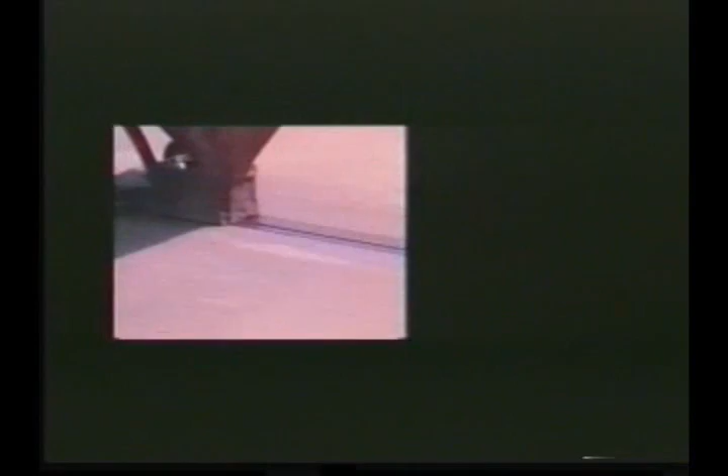TA500 is modified with polymer for greater flexibility and adhesion in both asphalt and concrete slots. Using TA500 will increase your productivity and thereby your profitability. This video will demonstrate how quick and easy TA500 is to use and how to properly seal a loop with it. For demonstration purposes, we will be sealing a 6-foot by 40-foot quadrupole loop.

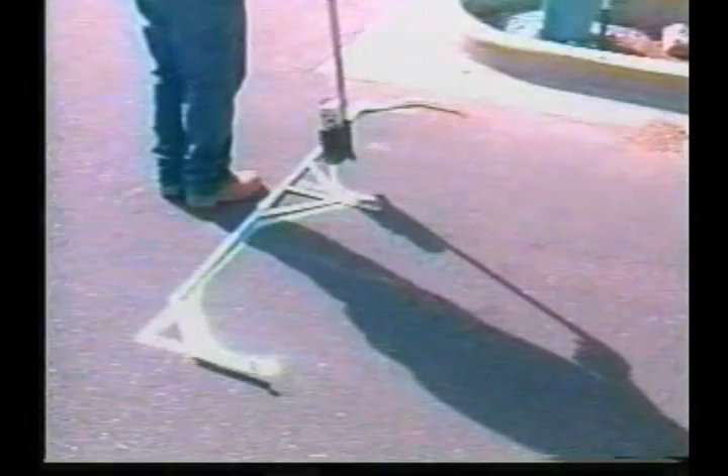We'll start by making the loop on the roadway. To lay out the loop, we use a template to efficiently mark out both ends of the loop. After we have marked our loop, we will cut a 2-inch by 3/8 inch wide saw cut using the dry cutting method. You can also wet cut when using TA500 loop sealant.

If you are wet cutting, make sure there is no standing water in the slot. Slots that are slightly damp or moist are recommended to ensure desired penetration and adhesion of TA500 in the slot. Standing water will create voids in the sealant.

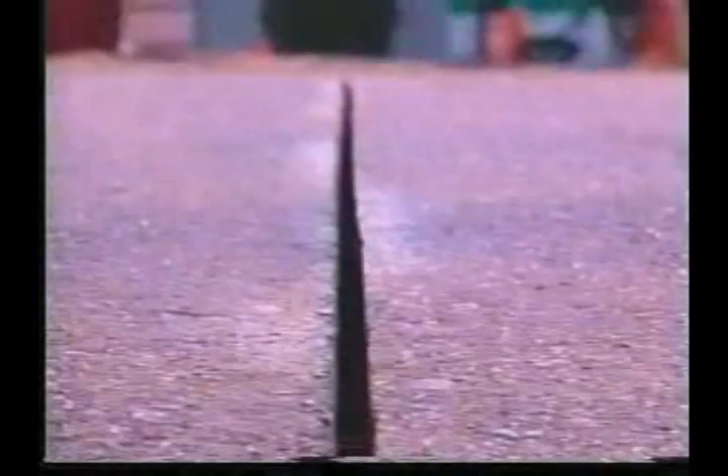As you can see, the slot is now full of dust and debris. Using an air hose and compressor, make sure all dust and debris is blown out of the cut. A leaf blower can also be used to clean the slot. The slot is now clean and ready for installation of the inductive loop wire.

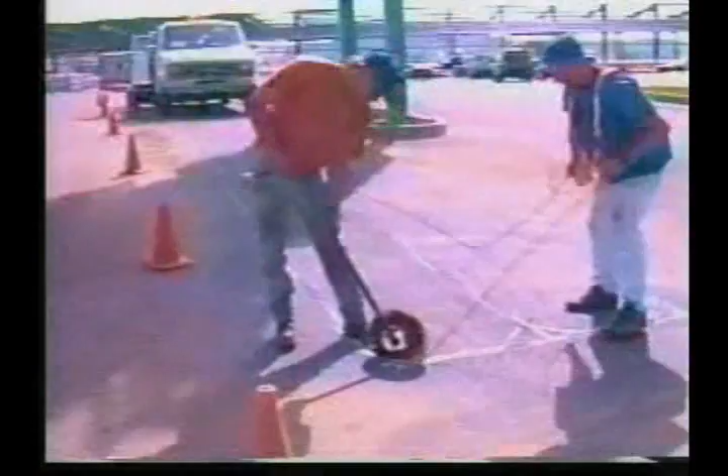A wire roller is used to feed the wire into the slot. This allows quick installation and ensures that the wire is properly seated in the slot. Note how easily the wire is inserted into the slot and corners. This is one tool that will make your job easier and increase the productivity of your crew.

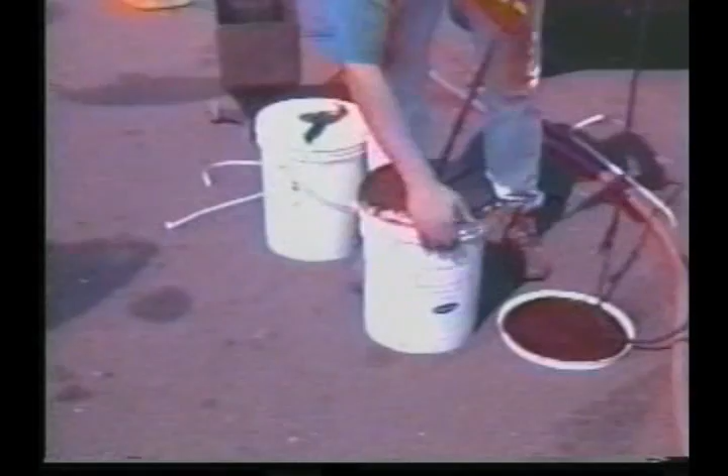Once the wire is in place, it's time to apply TA500 loop sealant. First, stir TA500 with a drywall paddle mixer and drill. Pre-drill a small hole in a bucket lid to prevent the sealant from splattering. This lid and mixer assembly is kept with a bucket of water for use the next day or the next loop. Stir TA500 for 10 to 15 seconds. It should have a smooth, even consistency without lumps.

Since TA500 is reusable, we recommend that you mix all buckets at once. This can be done for the whole day by one person while loops are being marked and cut, or at the shop before the crew goes into the field. Do not overmix TA500. To do so can induce air bubbles into the sealant.

After stirring the sealant, place the paddle mixer in a bucket of water. Seal the lid. Stir for about 10 seconds. This will remove loop sealant from the mixer and prevent buildup. You're now ready to seal your loop with TA500.

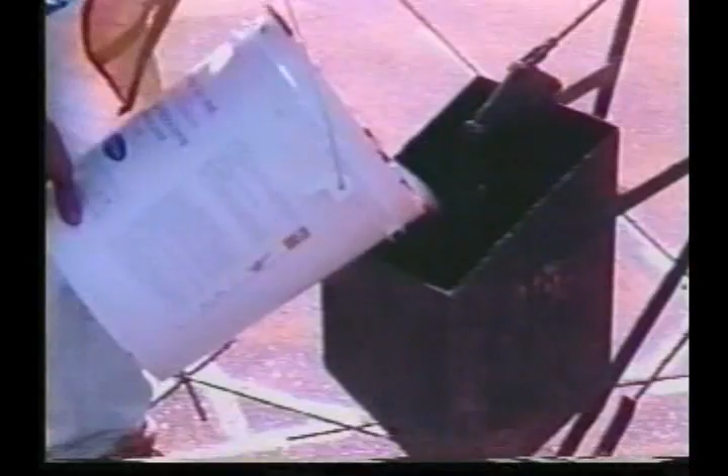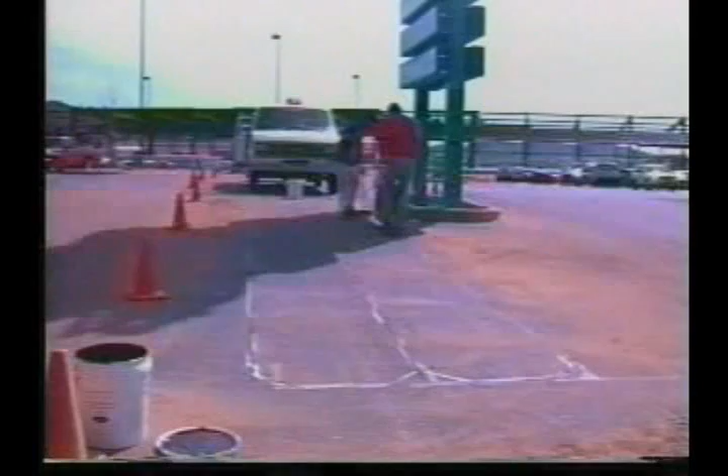Pour sealant from the bucket into the pour pot. Place the reservoir, the bottom part of the pour pot, over the slot. Squeeze the handle until the reservoir is filled with sealant. After the reservoir is full, start pulling the pour pot backwards at an even pace, filling the slot as you go.

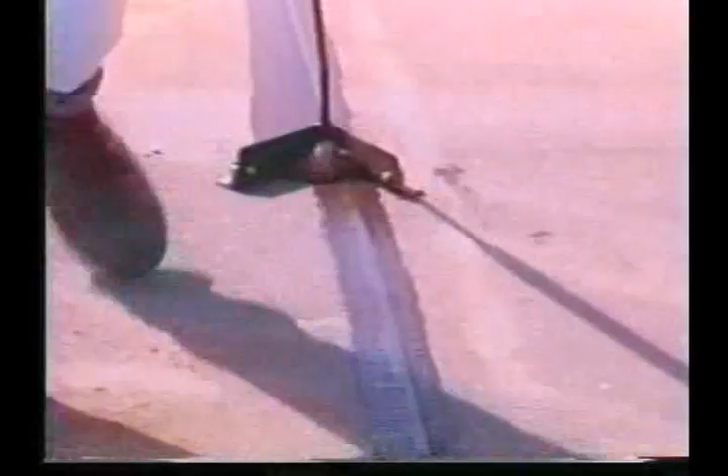A technician with a V-shaped squeegee will follow behind the pour pot, pressing down on the squeegee until the bottom flattens, striking off excess sealant. This procedure reduces waste and ensures that the slot is properly filled.

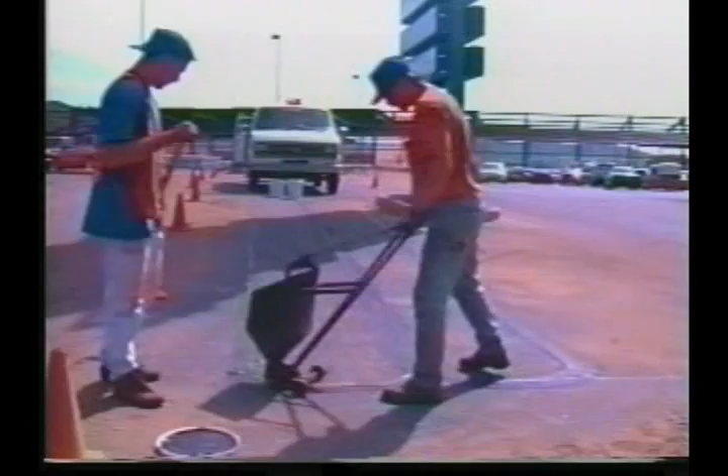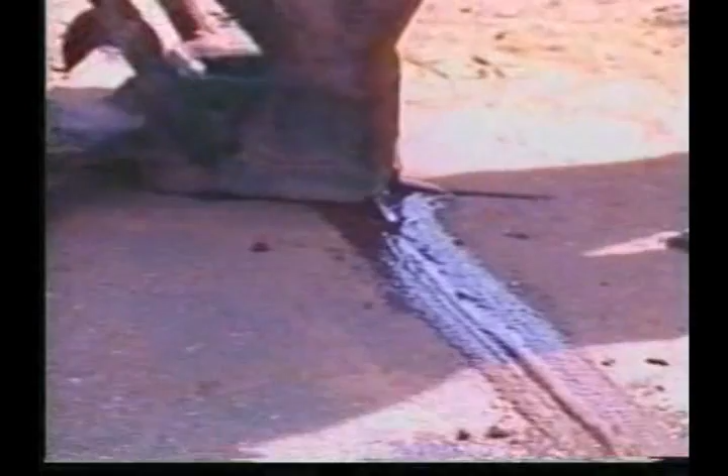Approximately 5 to 7 gallons will seal a 6-foot by 40-foot loop and the home run. Your results may vary depending on the width and depth of the slot, length of the home run, and application technique. Continue until the entire loop is sealed. On average, you should be able to seal a 6 by 40-foot loop in less than 3 minutes.

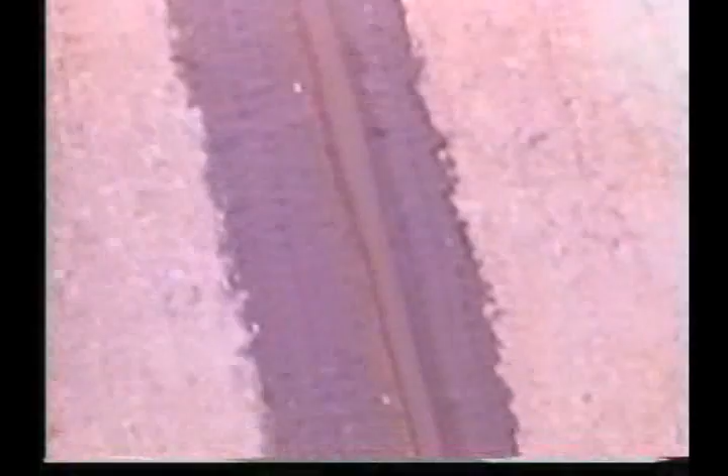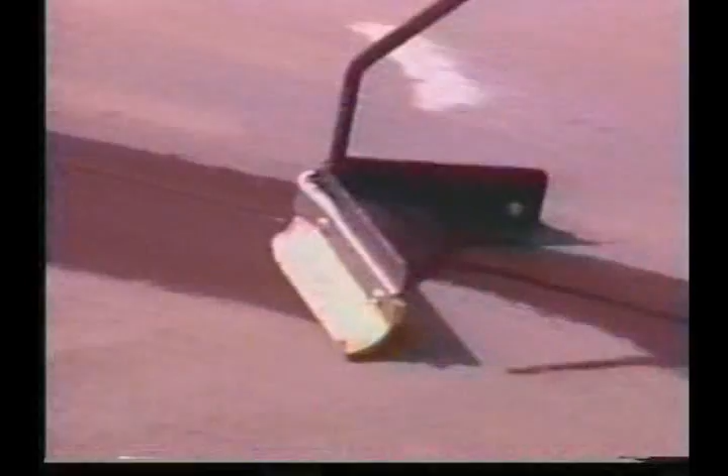After the 6 by 40-foot section is completed, the home run must be sealed. Notice on these close-up shots how much sealant is needed to fill the slot properly. Again, follow the pour pot with a squeegee, striking off excess sealant as you go. Since TA500 doesn't adhere to automobile tires, traffic needs only to be stopped momentarily while the home run is being filled. Traffic can be released immediately following completion of the home run.

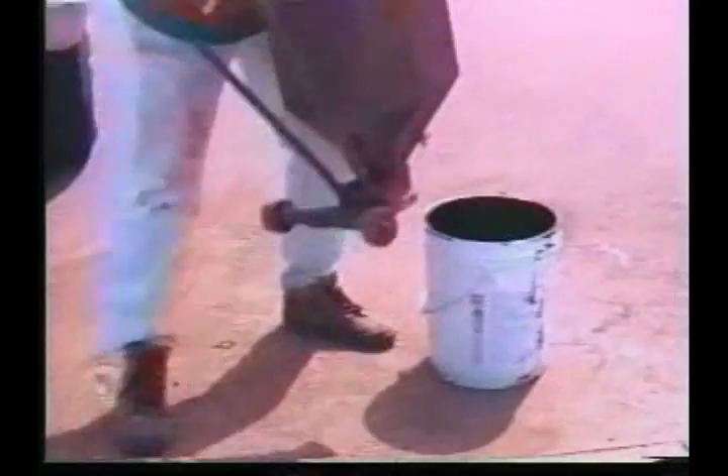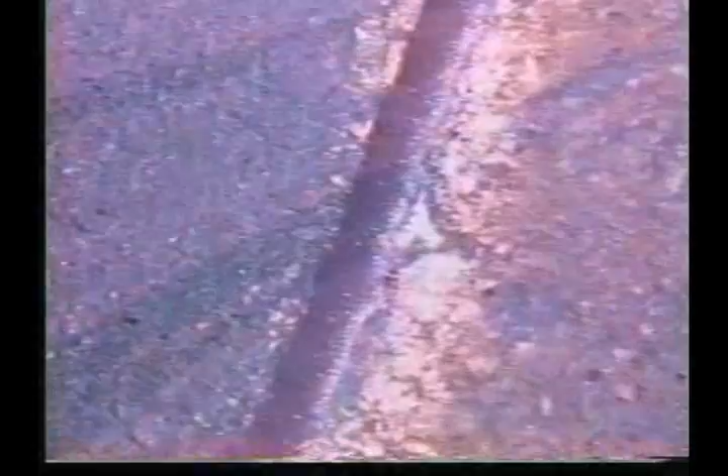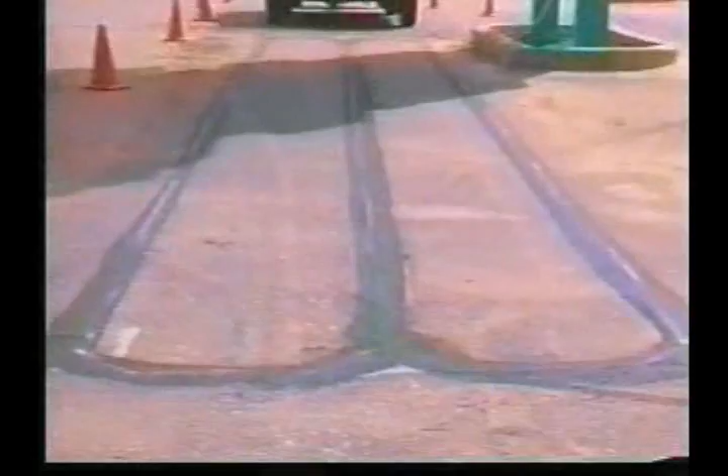Now it's time for cleanup. TA500 dries on the surface in approximately 5 to 10 minutes in warm weather, forming a skin that protects the wire from rain and traffic. Cure time will depend greatly on the width and depth of the slots filled and weather conditions. During the curing process, TA500 may feel soft to the touch for several days after application without affecting the final results. The Band-Aid or excess sealant on the roadway will wear away within 2 to 3 months.

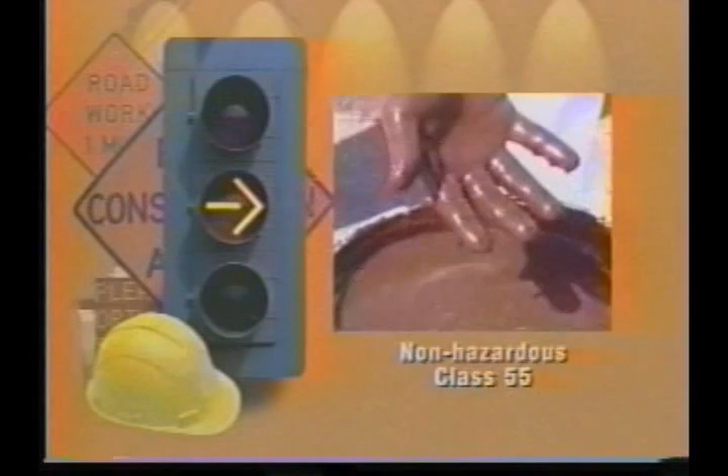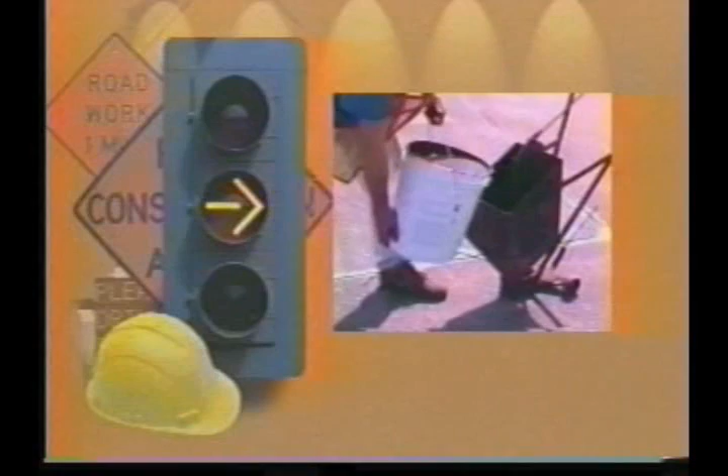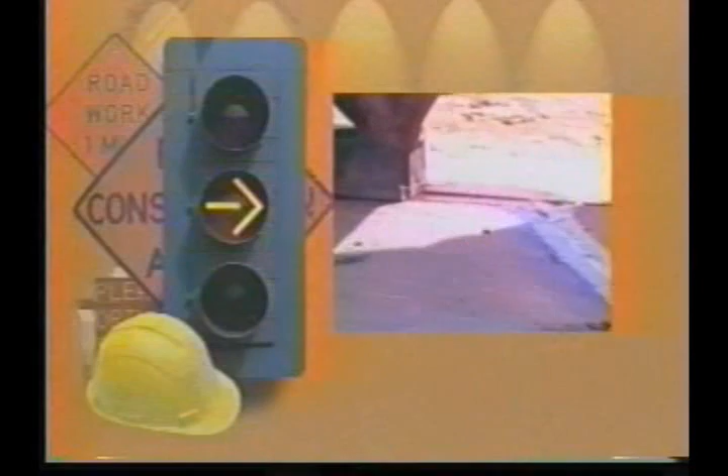Here are some frequently asked questions concerning TA500. Is TA500 considered a hazardous material? No, it's classified as a non-hazardous material class 55. Are there any special tools or costly equipment required? No, TA500 can be poured directly from the container or any suitable applicator. However, we recommend using a pour pot and squeegee for maximum results. How much sealant is required per loop? TA500 will fill and seal approximately 30 linear feet per gallon on a 1/4 inch by 2 inch slot cut.

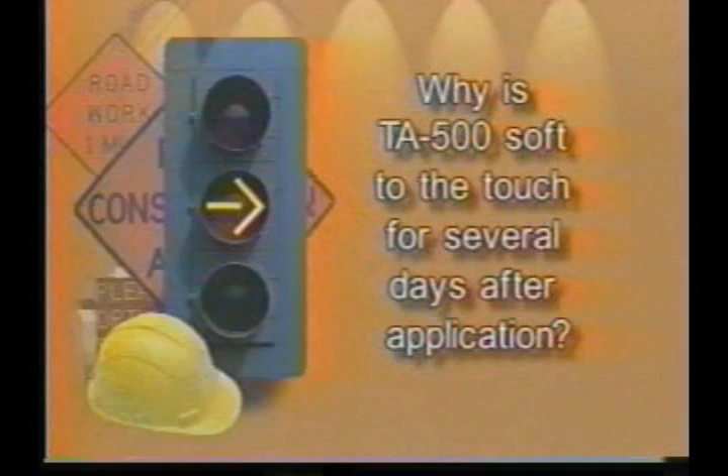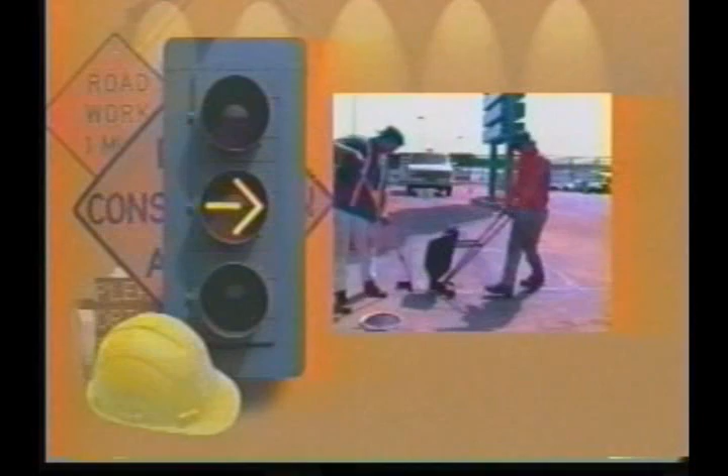Why is TA500 soft to the touch for several days after application? Unlike the chemical cures of other systems, TA500 is water-based and cures by evaporation. This process can take up to a few days to complete. The loop wire is 100% encapsulated during this time. There are very fine surface cracks in the sealant. Why? And does it affect the quality of the installation? TA500 cures by evaporation, and surface cracks may form due to evaporation of water in the sealant. This process does not affect the quality of the installation.

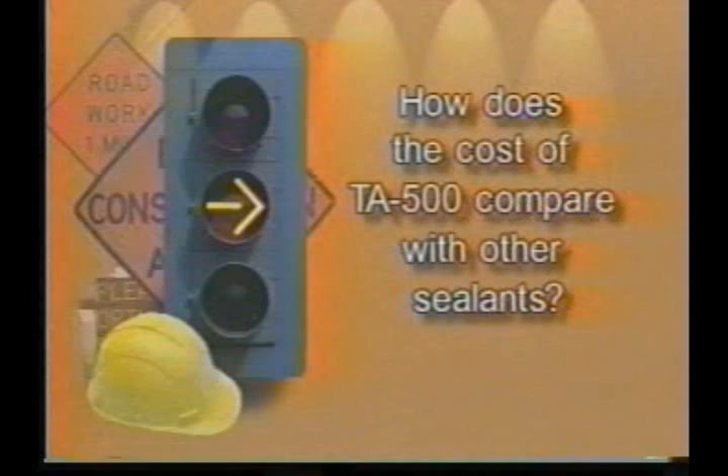What precautions, if any, need to be taken? TA500 should not be applied during or when rain is imminent. Application temperature should be at least 50 degrees Fahrenheit and rising. Protect from freezing. How does TA500 cost compare to other sealants? TA500 is approximately 30% less in cost than other one-part polyurethane sealants. How will TA500 affect my bottom line? Productivity should increase by approximately 30%. Sealant costs will decrease by approximately 25 to 30%.

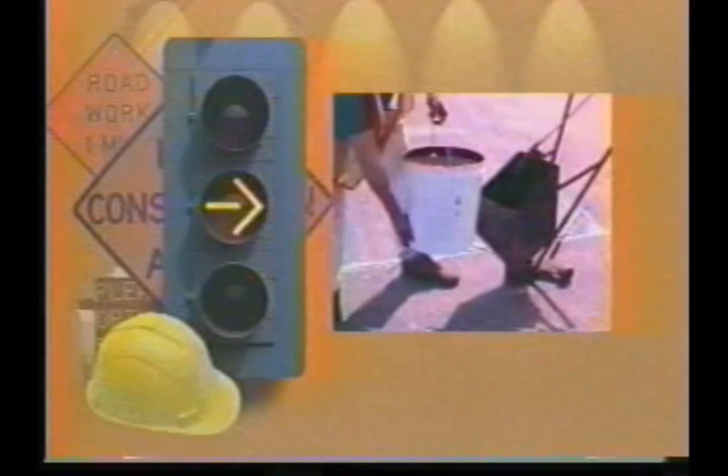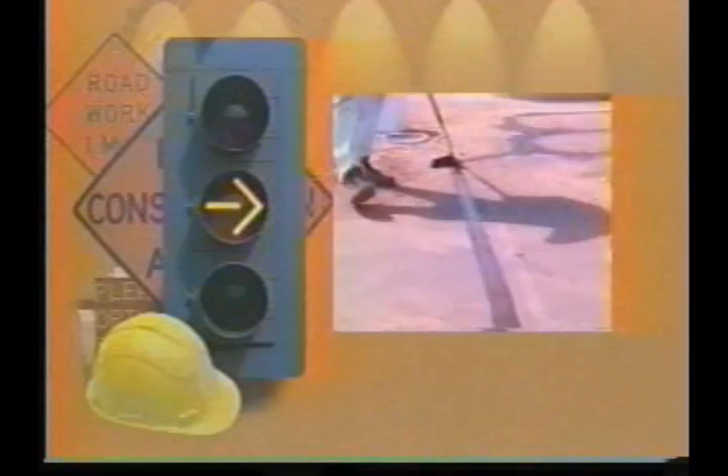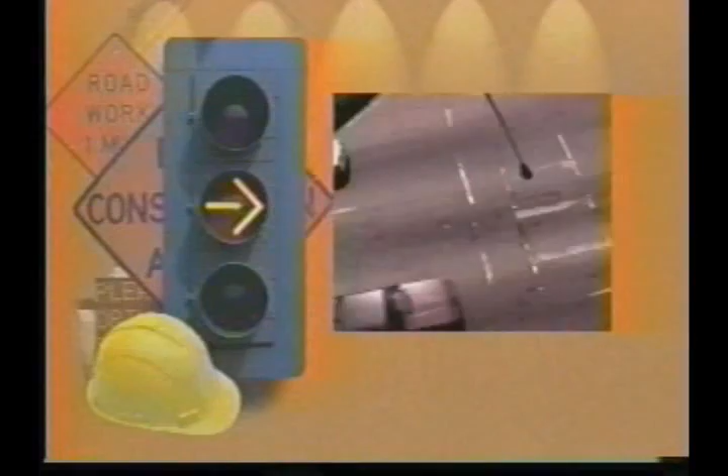How does TA500 affect safety risk? A, it decreases workers' compensation claims. Workers will not be exposed to toxic vapors. Workers will not be exposed to chemicals that can burn skin. Workers will be using proper tools which will prevent lower back injuries. And B, TA500 decreases liability risk due to increased productivity. Traffic lanes are closed for shorter periods of time, which means less exposure to traffic hazards.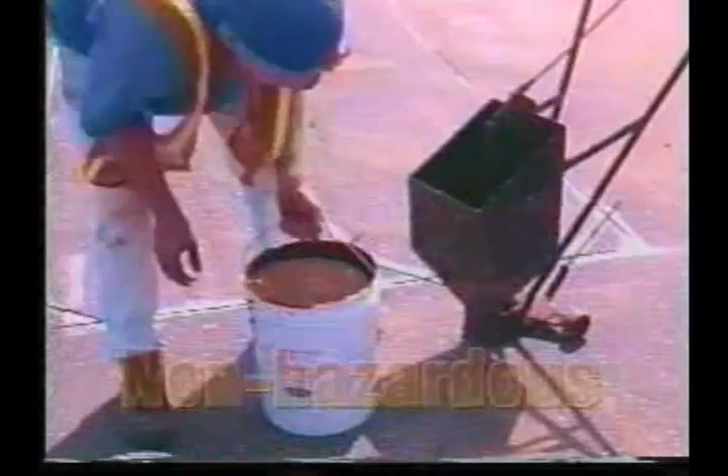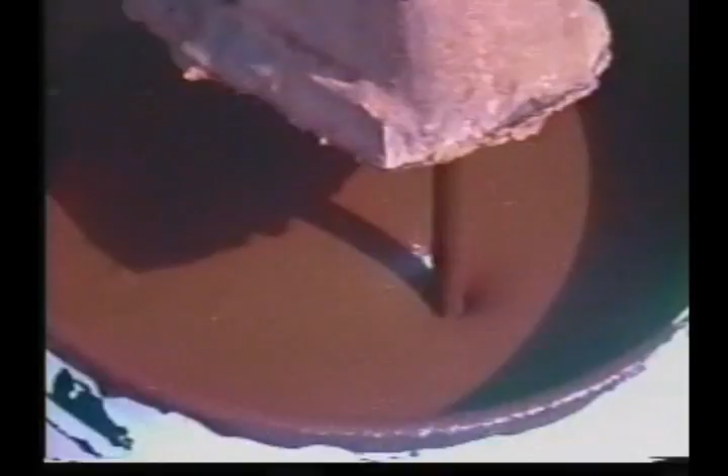You have just watched a demonstration for TA500 loop sealant. TA500 is a unique loop sealant that is environmentally and user-friendly. Classified as a non-hazardous material, it is water-soluble prior to curing and cleans up with water. TA500 is economically superior. It comes ready to use, requires no costly equipment, and speeds up application time. Any unused portion can be used on your next loop and has a shelf life of 1 year. In addition, TA500 is technically advanced. Modified with polymer for superior flexibility and adhesion in both concrete and asphalt, TA500 is quick and easy to install. Traffic can immediately drive over a loop without the sealant being pulled from its slot.